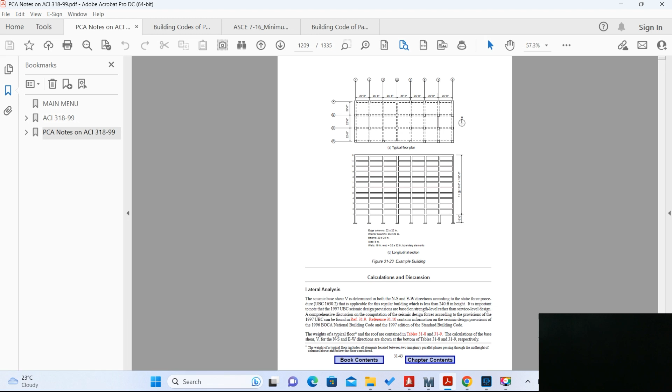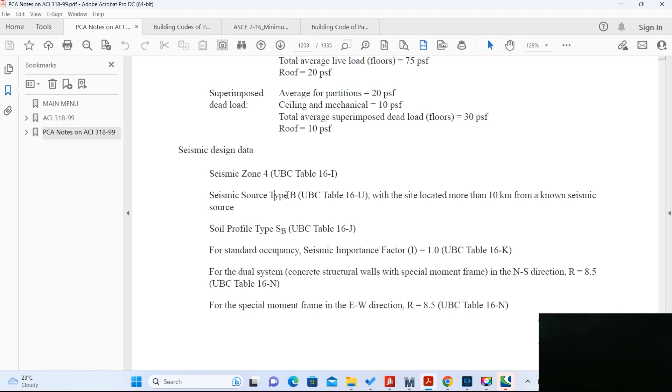As usual, this example I took from the PCA notes on ACI 318-99, an example given on this page: calculation of seismic forces for a 12-story frame shear wall building and its components. So the same example I took, but this time I am not using UBC 97 and seismic zones; rather I am using ASCE 7-16.

So the same example I took from here, and I prepared my load calculation in MathCAD. You can see the building is the same, and now I'm considering Pakistan Building Code 2021, which is the same as ASCE 7-16.

For site conditions, I consider that this building is assumed to be in Islamabad. Why Islamabad? Because Islamabad lies in the lower limbs of the Himalayas, and the lower limbs of the Himalayas have seismic activity, as the Himalayas themselves do.

Before, Pakistan Building Code UBC 2007 considered this as seismic zone 2B. In fact, I have some reservations on that, because UBC 97 actually considered Islamabad and Karachi both as seismic zone 4. So there was a big difference between seismic zone 4 and seismic zone 2B.

Anyway, now I assume the same building in Islamabad, and I have considered the seismic data as per ASCE 7-2016. As you know, in 2016 there are two major changes: number one, the wind load is also an ultimate load now, and the seismic conditions are totally different than UBC 97. So as per our Pakistan Building Code, the basic wind velocity is 100 miles, and we should consider Islamabad as category C.

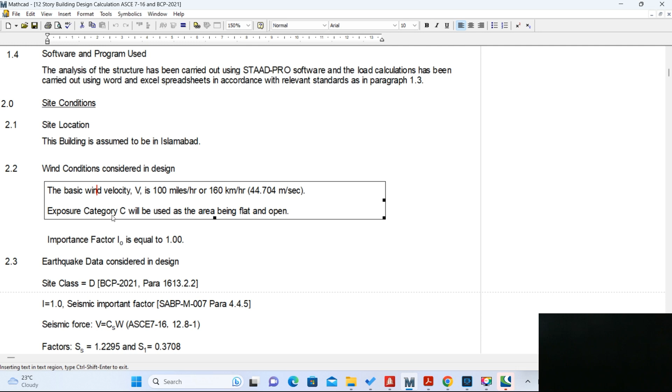In the earthquake data which should be considered in design, the site class should be D, importance factor should be 1, and the factors SS and S1 are SS equal to 1.2295 and S1 equal to 0.3708.

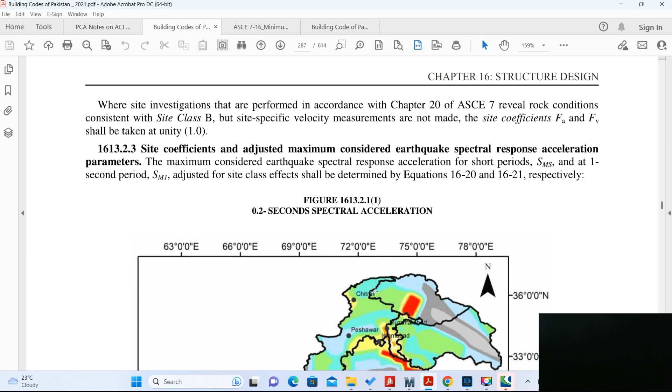From where did I take these values? If I open this Building Code of Pakistan 2021, I'll show you that when they define the earthquake loads, basically they have given figures. For example, this is SS and S1, but these are not tabulated, meaning one has to figure it out from these figures and the color code scheme.

I was not very comfortable with this scheme. I think they should have included a table where specifically these values are tabulated for Islamabad and all the big cities like Karachi, Quetta, Peshawar, Lahore, everything.

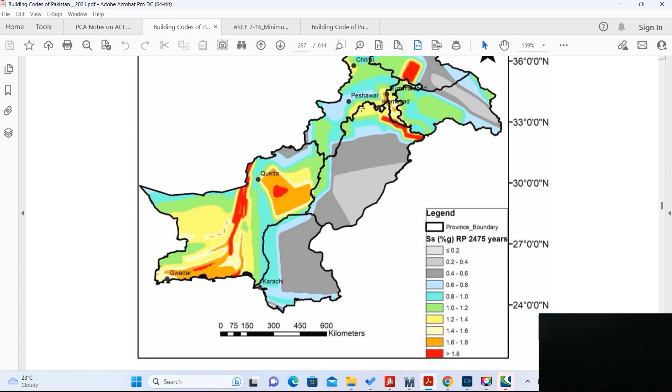Then I found that one gentleman, Fawad Najam, who is one of the contributors of the code, has a website where he has tabulated these values. I'll go to the table - Islamabad is not there, so I took Rawalpindi, because Islamabad and Rawalpindi are twin cities. In Rawalpindi, the SS value is 1.2295 and S1 is 0.3708.

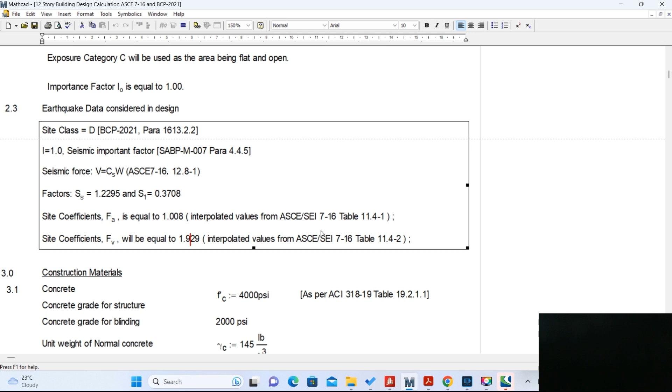So I took these two values and plugged them in: SS as 1.2295 and S1 equal to 0.3708. The site coefficient as per the table, FA is 1.008 and FV is equal to 1.929. You can check these values from the table, but further details are there. The material is F'c 4000, and the concrete unit weight is 145 or 150 pounds per cubic foot. These are standard values, no need to change anything.

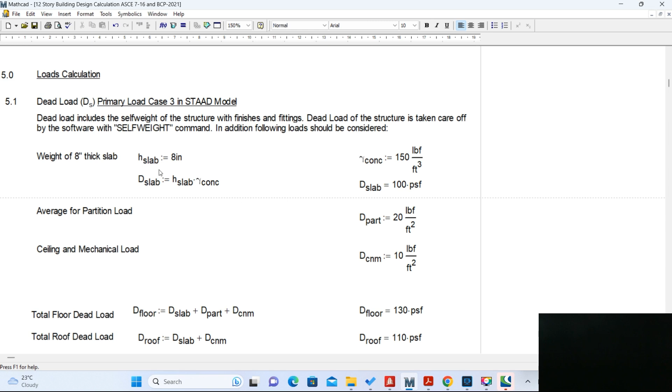But anyway, the important thing is the loads defined here. In my load calculation, the dead load is calculated like this - the weight of the slab, etc. This load has already been provided in my STAAD model, which is the same as the previous model. So all the vertical loads are the same, no need to change those. You can see the dead load, as I calculated before, is the same.

Live load, as per the example given: for the floor, this is 75 pounds per square foot, and for the roof, it is 20 pounds per square foot. Then I calculated wind load.

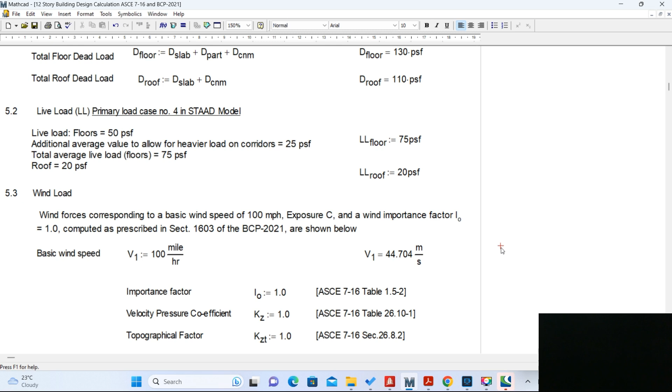As I mentioned in Building Code of Pakistan 2021, section 1603, the wind velocity should be considered as 100 miles per hour, which is equal to 44.704 meters per second. Importance factor is 1, Kz equals 1, Kzt equals 1. All the cross references are provided here. Kd should be 0.85, but I took 1.

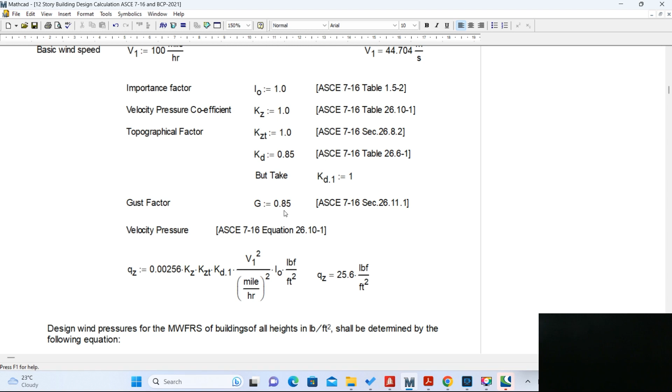The gust factor is 0.85 and the velocity pressure, as per the formula, comes out to be 25.6 pounds per square feet.

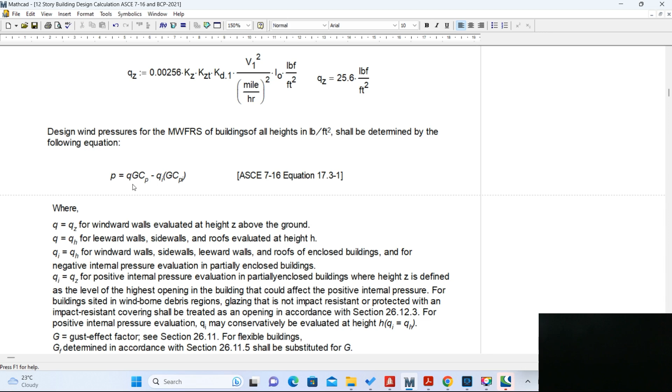For the main wind force resisting system, the load is applied as per the equation P equals Q times GCp minus Qi times GCpi. I used the wind load generator in STAAD and applied the load. I will explain how it is done.

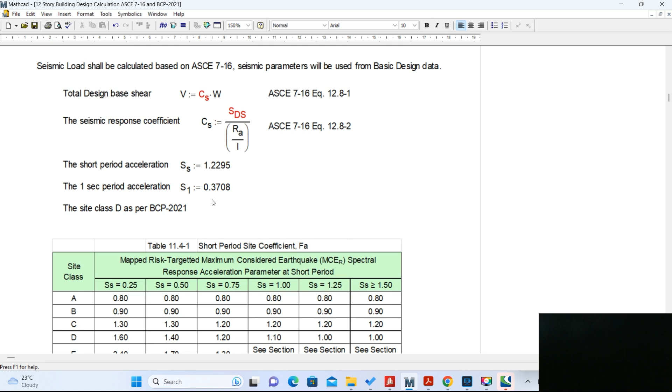For seismic load, as I mentioned, SS equals 1.2295, S1 equals 0.3708, and site class D should be considered as per BCP 2021. The values of Fa and Fv, as per table 11.4.1, interpolated come out to be 1.008 for Fa, and for Fv the value comes out to be 1.929.

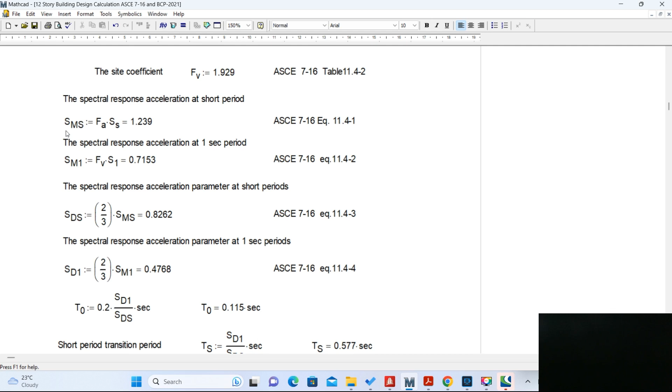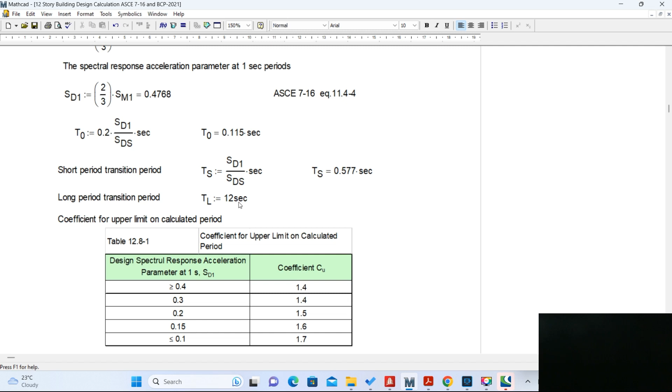Very simple. Then I calculated SMS, SM1, SDS, SD1, and the time period T naught, which as per the formula comes out to be 0.115. The short period transition period TS equals 0.57. The long period I took as 12 seconds. Some people take it as 8 seconds, some take it as 12 seconds, so it does not make any big difference whether you consider 8 or 12 seconds.

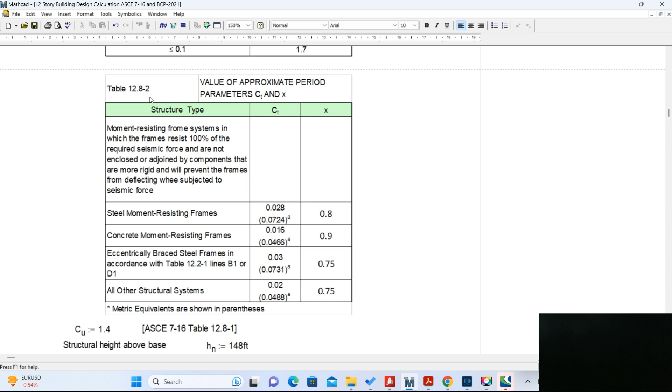The coefficient for calculating the upper limit for the period, CU, is here, and to calculate the time period, the values of CT and X as per table 12.8-2 of ASCE 7-16 are here. I took CU equals 1.4. The height of the building is 148 feet.

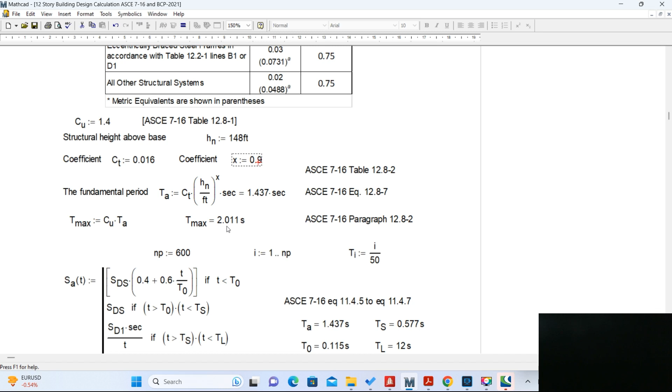CT comes out to be 0.016, meaning these are concrete moment resisting frames, so CT is 0.016 and coefficient X equals 0.9. So the fundamental time period comes out to be 1.437 seconds, and the maximum value of T comes out to be 2.011 seconds.

Based on all this data, I calculated the spectrum, and a spectrum is produced. This design response spectrum is produced here. The value of SA is called the design response spectrum acceleration.

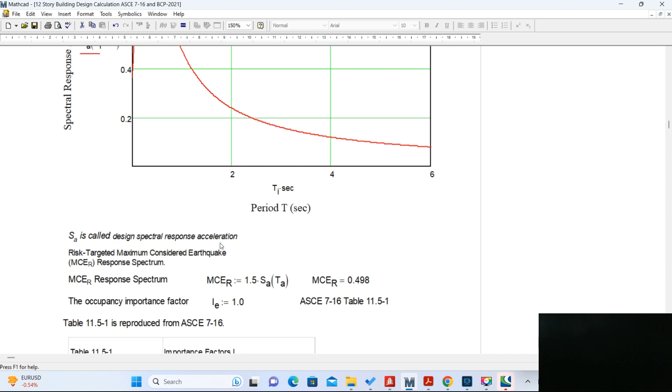This is based on the risk-targeted maximum considered earthquake, MCER. The MCER response spectrum can be calculated with this formula, where MCER is 0.498. The importance factor is I, given in table 11.5-1.

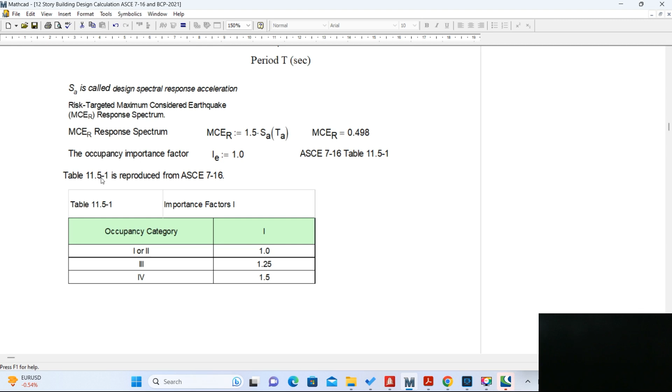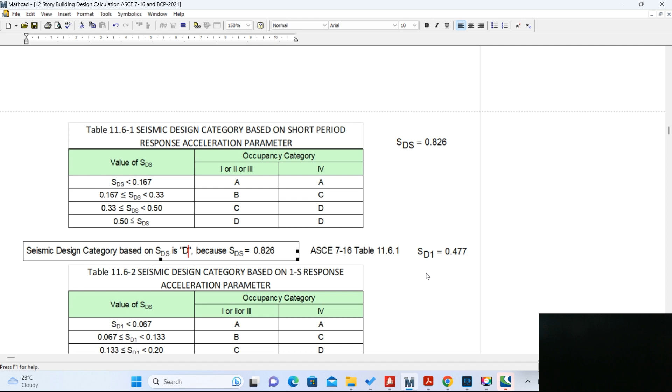Having all these values, I tried to evaluate the seismic design category. Based on short period response, if SDS equals 0.826, then the seismic design category based on SDS is D, and similarly the seismic design category based on SD1 comes out to be D also. So it is confirmed that the seismic design category for this structure is D.

That means in Islamabad or even in Karachi, the seismic design category will be D. So one has to be very careful, because if the structure falls in seismic design category D, there are special requirements and we have to evaluate all of them. I'm going further down to explain the requirements for seismic design category D and what parameters I have considered.

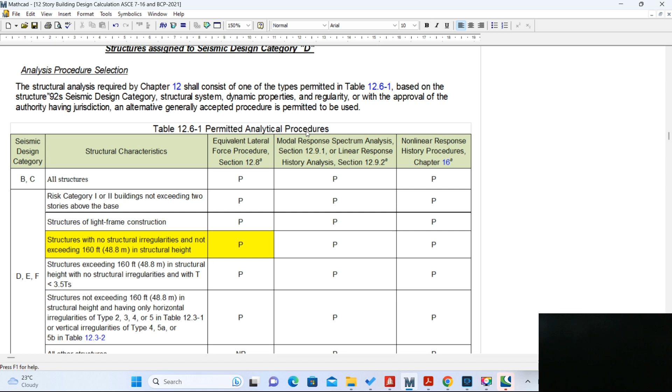For example, what should be the analysis procedure? As mentioned in chapter 12 of ASCE 7-16, table 12.6-1, the permitted analytical procedures are: if the structure has no structural irregularities and does not exceed 160 feet in structural height, then the equivalent lateral force procedure as explained in 12.8 is allowed.

Although you can go for modal response spectrum analysis or nonlinear response history procedure, given in section 12.9 and chapter 16, these are permitted, but we will go for the simplest one, the equivalent lateral force procedure given in 12.8.

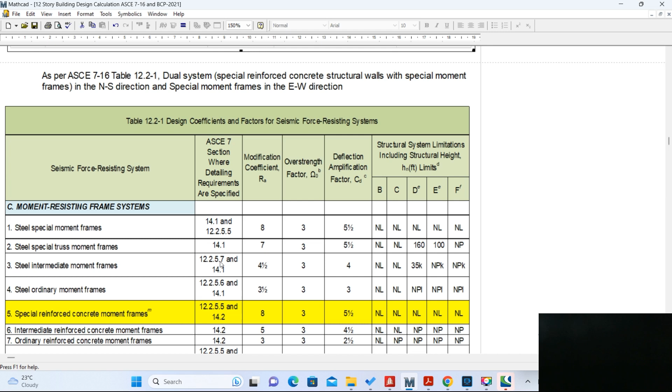So as per the permitted procedure, I am going further down to see that since this building is a special reinforced concrete moment frame, the value of Ra, the modification coefficient, should be 8. The overstrength factor Omega should be 3, and the deflection amplification factor Cd should equal 5.5.

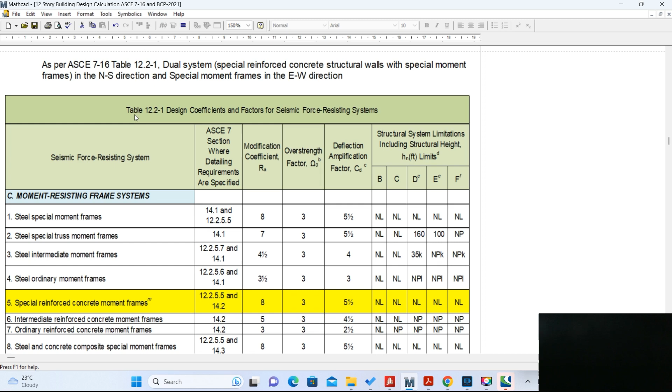Structural system limitation including structural height—there is no height limit, meaning we can safely use these parameters. All these tables are taken from ASCE 7-16, like this table, table 12.2-1. Similarly, in another direction where it is resisted by the shear wall, the values are 7, 2.5, and 5.5.

That means in north-south direction, the shear walls should be considered in resisting the lateral forces. But in east-west direction, there is no shear wall.

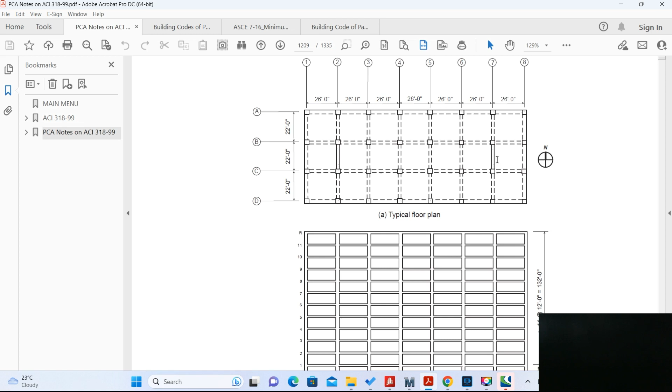So in north-south direction, the response modification factor should be 8. System overstrength factor should be 3, and amplification factor CD should be 5.5.

Now we have to check irregularities. We have to identify types of horizontal irregularity. The types are 1A, 1B, 2, 3, 4, and 5. 1A is torsional irregularity, 1B is extreme torsional irregularity, type 2 is re-entrant corner irregularity, number 3 is diaphragm discontinuity irregularity, number 4 is out of plane offset irregularity, and number 5 is non-parallel system irregularity.

Here in our case, none of the conditions are applicable, so we have not considered any action. This is not applicable. In horizontal cases, this building is a regular building.

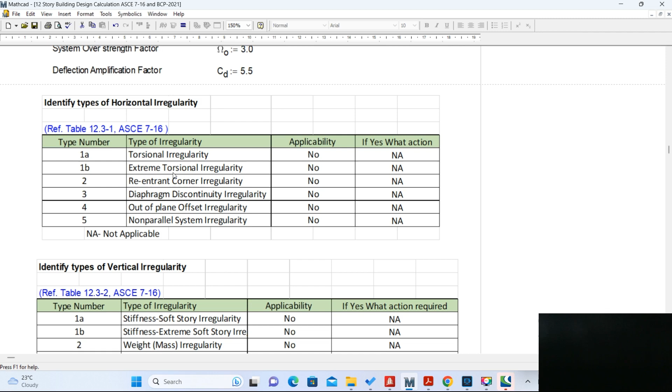What about vertical irregularity? In vertical direction, there are irregularities 1A, 1B, 2, 3, 4, 5A, and 5B. 1A is stiffness soft story irregularity. 1B is stiffness extreme soft story irregularity. Number 2 is weight or mass irregularity. Number 3 is vertical geometric irregularity. Number 4 is in-plane discontinuity in vertical direction. Number 5 is discontinuity in lateral strength, and 5B is discontinuity in lateral strength.

Of course, you can check the details. But again, in vertical direction, we do not have any irregularity, so no action has been taken.

Redundancy factor, as per paragraph 12.3.4.2, I took the value of rho equals to 1.3.

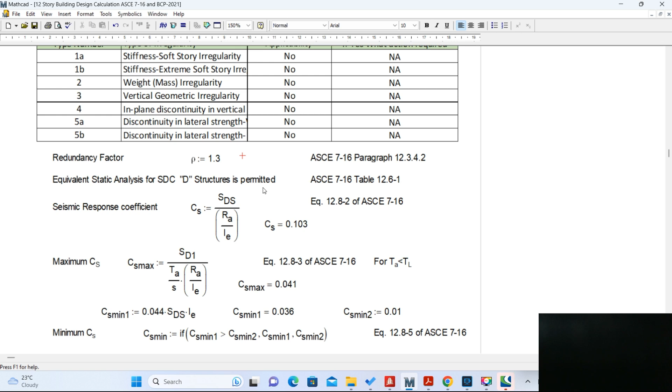Equivalent static analysis for seismic design category D structure is permitted as per table 12.6.1. The seismic response coefficient CS is this much, and finally the CS comes out to be 0.041.

Now here I want to mention one point. In north-south direction, if we calculated this coefficient for base shear based on UBC 97, it was almost the same, I think 0.044. I can say that although the base shear value is almost the same, the value of base shear will not be much different when we compare both codes, that means UBC 97 and ASCE 7-16.

That means if someone is designing a building in Islamabad or Karachi based on Building Code of Pakistan 2007, and if someone is designing the same building with the new code, Building Code of Pakistan 2021, he will get almost the same value of base shear. But then what is the difference? The difference is in terms of detailing requirements. So not only do you have to be very careful in evaluating the base shear, but also you have to think about the detailing requirements of the structure.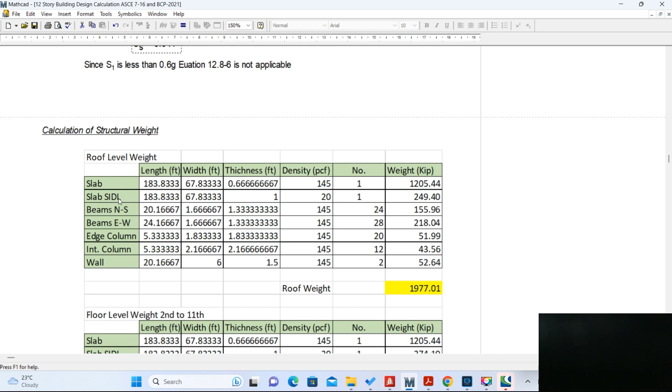So here I'll explain how I further calculated the structural weight: the slab, superimposed dead load, beams, column, and total weight. That's from second to eleventh story, and this is the ground floor.

So all these values are calculated here, and then I distributed the seismic load in vertical direction in north-south direction. This is the vertical distribution of base shear in north-south direction, given by equations 12.8-11 and 12.8-12 from ASCE 7-16.

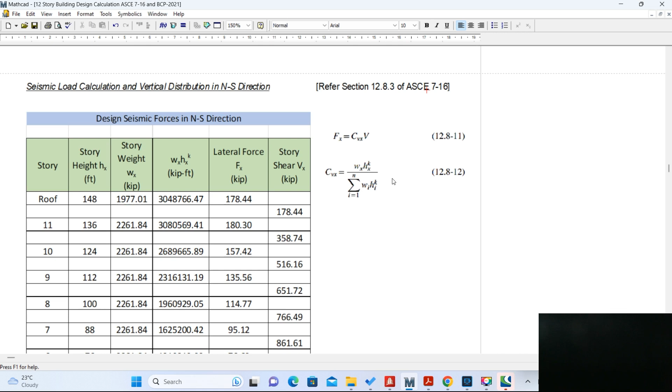So I tabulated all these values and calculated the story shear, for example at roof, 11th, 10th floor, etc. This is the total value of base shear distributed vertically.

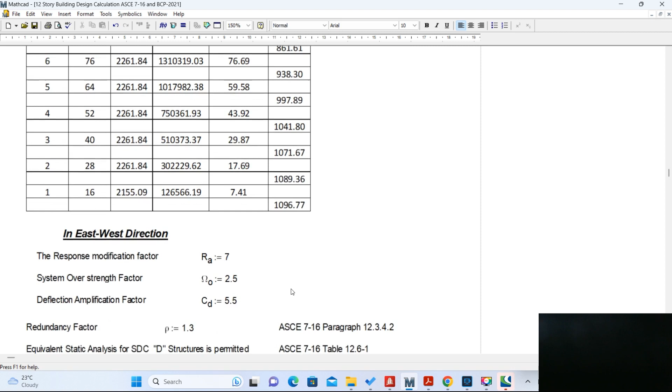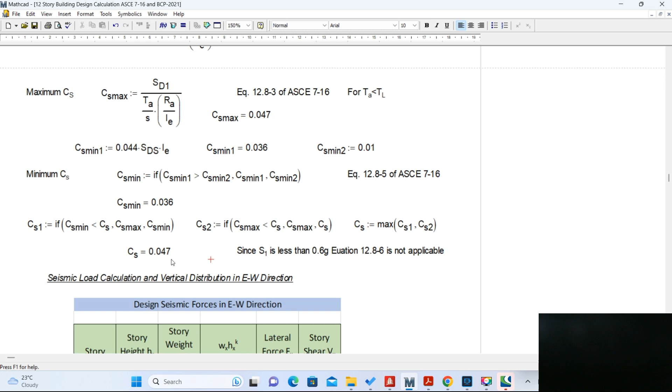In east-west direction, as you know, I have taken R is equals to 7, omega is 2.5. The whole procedure is the same, just a replica of the north-south direction. Here the coefficient for base shear comes out to be 0.047. Again it's almost the same, so the base shear is in the same order, and the vertical distribution in east-west direction follows the same procedure.

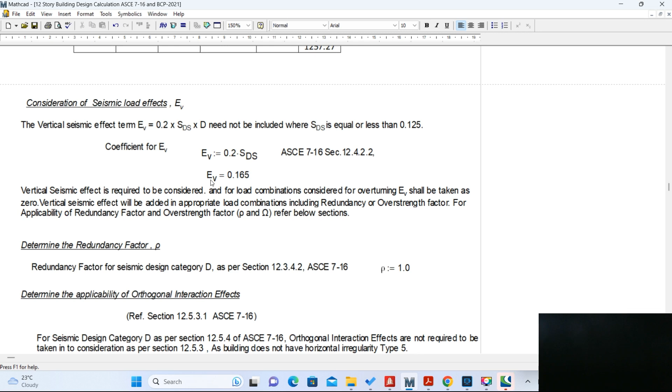So the base shear value remains almost the same, but now there is a big but. We have to consider the effect of vertical seismic effect EV, which is 0.2 times SDS times D, the dead load, as per section 12.4.2.2. Here I calculated the coefficient for EV, which comes out to be 0.165.

Rho I have considered as 1.3, as I have mentioned before.

Now we have to determine the applicability of orthogonal interaction effect. For seismic design category D, as per section 12.5.4 of ASCE 7-16, orthogonal interaction effects are not required to be considered, as per section 12.5.3, because the building does not have horizontal irregularity of type 5. So this is very important.

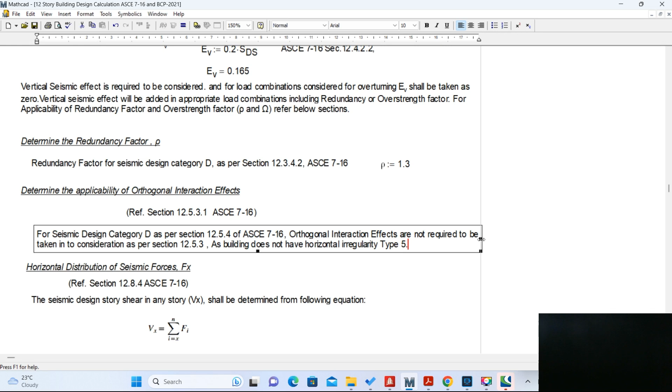Now, horizontal distribution of seismic force effects. I have generated the seismic force by the load generator of STAAD Pro, so it distributed the load by itself. I did not do anything; I left it for the software to consider.

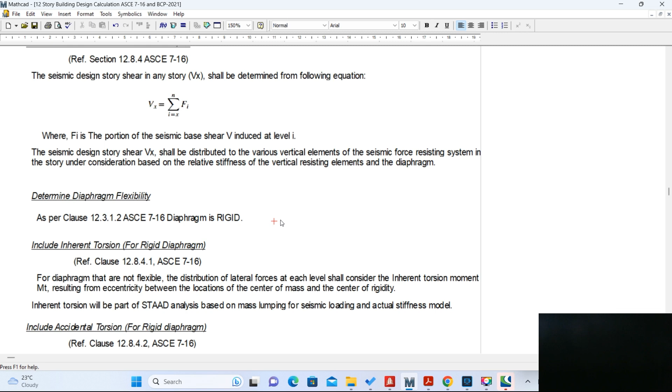Diaphragm flexibility: as per clause 12.3.1.2 of ASCE 7-16, the diaphragm considered is a rigid diaphragm. So I modeled this diaphragm as a rigid diaphragm in STAAD. Accidental torsion for rigid diaphragm, I considered 5%.

This inherent torsion will be part of a STAAD analysis based on mass lumping for seismic loading and actual stiffness model.

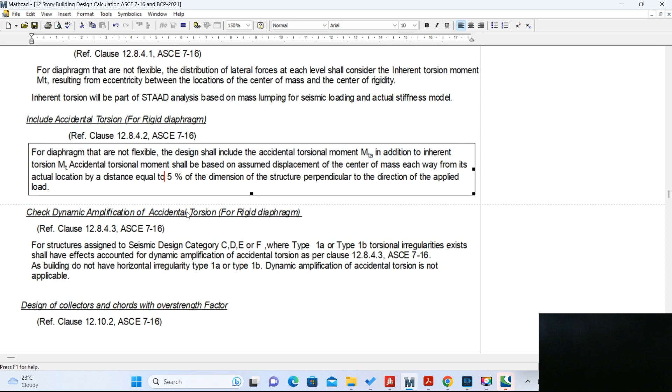Accidental torsion is taken as 5%, which is a general rule, nothing special. Dynamic amplification of accidental torsion for rigid diaphragm is not applicable in our case because there are no irregularities of type 1b, etc.

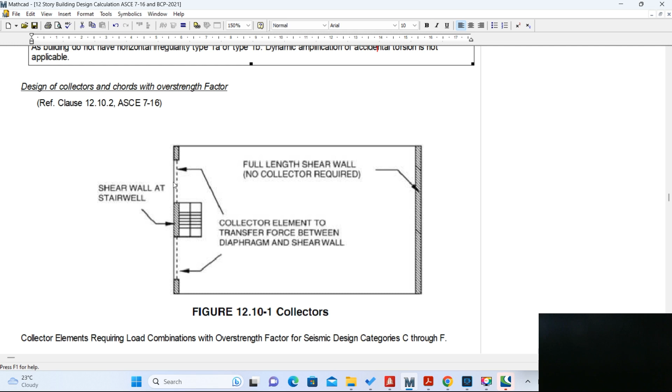Design of collectors and chords - this is very important. As per figure 12.10-1, for a full length shear wall extending from one end to another, no collector is required. But for example, a small shear wall like a stairwell, the beams connecting the column and the shear wall are called collectors. In our example, I considered another load combination for collectors, and the beams are checked against these loads.

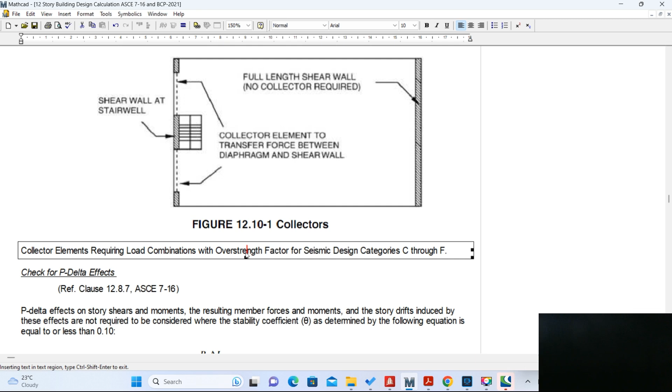So the collector elements require load combination with overstrength factor. This is very important for seismic design category C through F. Our seismic design category is D, so we have to consider overstrength factor to design the collector elements.

The P-delta effect as per clause 12.8.7 ASCE 7-16 - we have to check whether P-delta effect should be considered or not. I did not go into all these details to check everything, but I considered P-delta because I know that in concrete structures it is better to perform P-delta analysis.

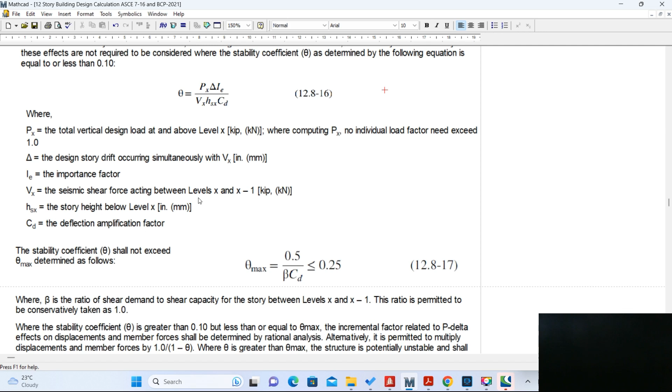So as I have mentioned, P-delta analysis has been performed by STAAD Pro.

Now for structural wall and their anchorage, they shall be designed for a force normal to the surface equal to FOP, which is equal to 0.4 SDS times the weight of the structural wall.

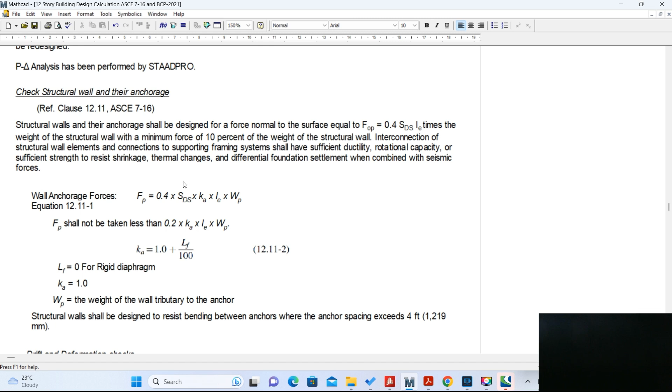Actually, in this example, I am not designing the structural wall separately, so for the time being I just left it as it is. Maybe in part 2 of this lecture, I'll design the structural wall and then consider the load as specified.

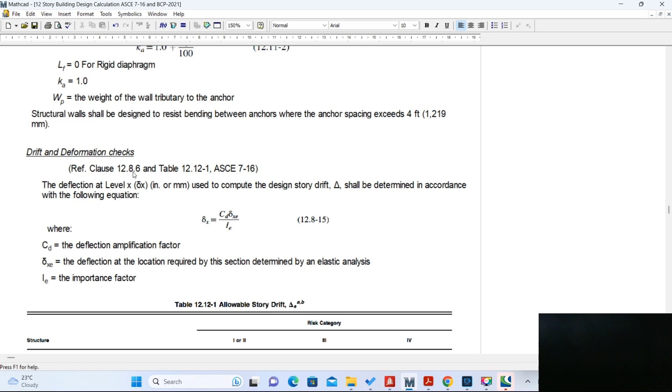The drift and deformation check - yes, this is done because for all other structures it's 0.02 times hsx, so the drift is checked with this parameter, and STAAD checks the drift with the limit given as 0.02.

So the detailing requirement - a special moment frame shall follow all requirements given in chapter 18 of ACI 318-14. 19 and 14 are the same. So all the detailing requirements should be fulfilled as per ACI 318.

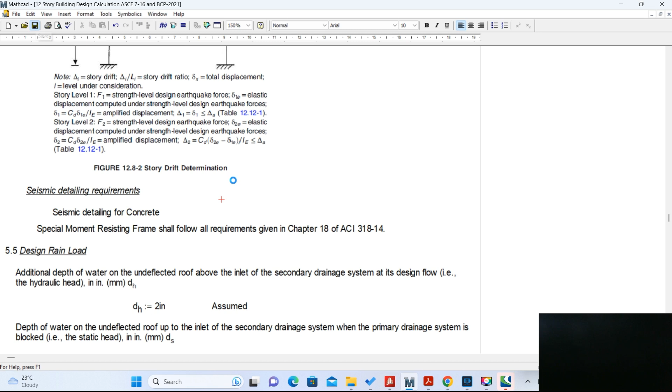Of course, in Islamabad, rain is there, so I have considered as per Pakistan building code the rain which is 2 inch. So the load of rain is equal to 52.52 pound per square feet.

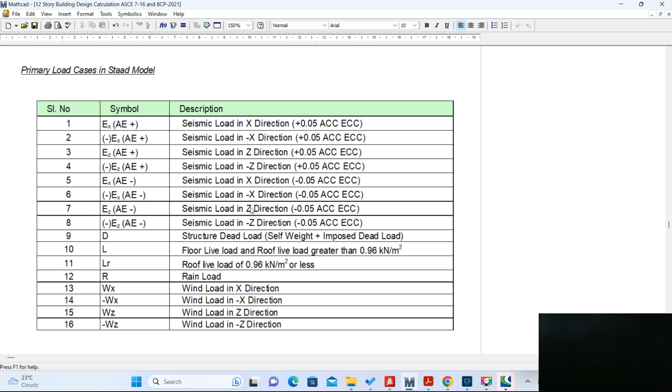Having all these loads and information given, I have considered these load cases. These are the primary load cases - for example, seismic load in X with 5% eccentricity, in negative direction, Z minus Z, in X and minus X, Z and minus Z.

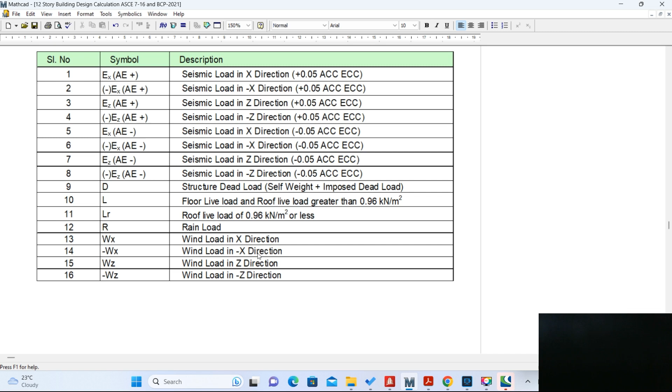So these are 8 seismic load cases. Ninth is the structure dead load, 10th is the floor live load, and the roof live load is taken as this. Rain is load case number 12, and at the end I define the wind load in x direction, minus x direction, positive z direction, and minus z direction. So all these loads are defined in my model.

I'll explain the load combination now - this is very important.

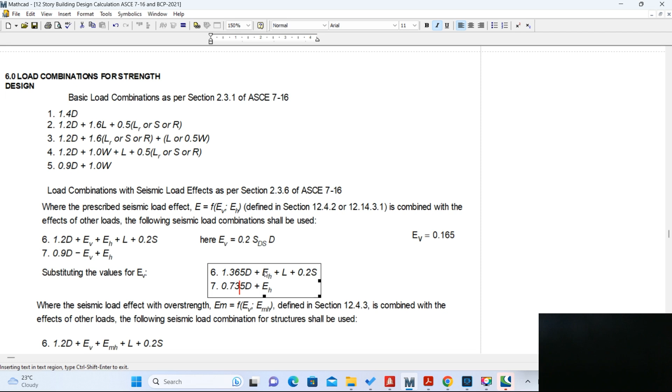My experience is that if you are using STAAD, you cannot generate the load combination based on the automatic load combination generator, because the vertical effect, etc., is not considered properly. So it is always better to check these conditions and then apply these combinations manually.

For example, the basic load combinations, equation number 1 to 5, are the same, no issues there. But when the seismic load is prescribed, you have to consider load combination number 6 and 7, where you have 1.2D plus EV plus EH plus L plus 0.2S. With all these factors, my load combination becomes 1.365D plus EH plus L plus 0.2S, and equation number 7 becomes 0.735D plus EH.

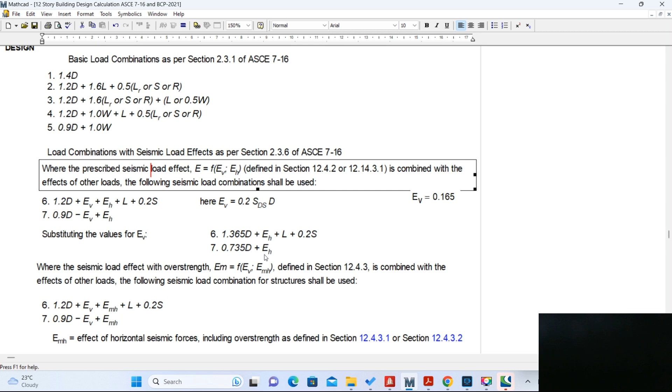For chords where the overstrength factor should be considered, as per section 12.4.3, the load combination should be 1.2 plus EV plus EMH plus L plus 0.2S. Here EMH is omega times QE, where QE can be taken as the effect of base shear calculated above, so it should be multiplied by omega.

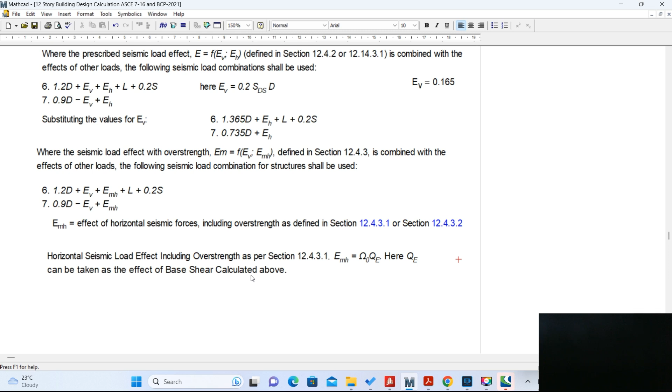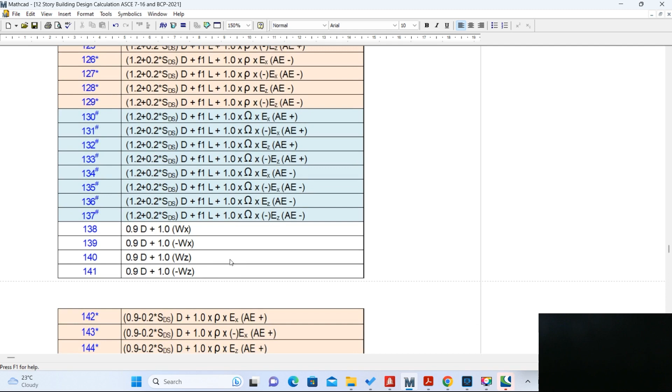So what I have to do is modify all my load combinations if generating them by load generator, or input manually all the load combinations. So all the load combinations are tabulated, defined with rho and omega. So a lot of load combinations are generated because of the seismic forces.

So let's go back to the model. This model, as you can check from my previous video, is the same model I have used.

The shear wall is 18-inch thick, and the external columns are 22 by 22 inch. The beams are 20 by 24, and internal columns are 26 by 26.

Then loading - as I mentioned, I defined the wind load cases. For wind load in positive x direction, same as wind load as per ASCE 7-16, the intensity is there, and wind load cases are here.

For example, the wind load in z direction - it will take little time.

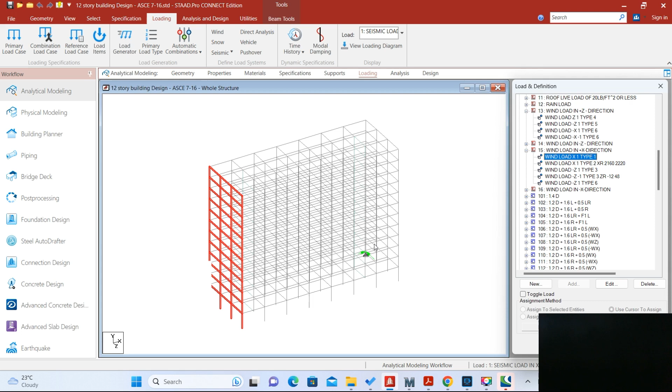It takes a little time to generate all the forces. So if wind is in the positive X direction, this is the windward, leeward, sidewall, all. So these forces are already calculated.

And for seismic conditions, as per ASCE 7-16, all the values are provided over here - weight, floor load, etc. All these values are provided, and all these seismic loads are provided here.

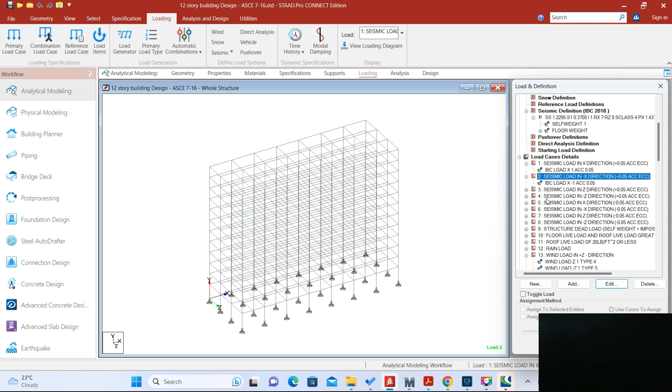Now, with all these loading conditions, if I analyze, it will take a little time, but anyway the result is that I will use to design the beams and columns, etc. I will use the advanced concrete design module of STAAD.

For the beam it's okay, but for the column there are some problems. Let me show you first what happens if we design the beams. I'll just design beams of only one floor, and then we will see if there is any failure or anything needs to be changed. Secondly, I'll design the columns and we will check.

Shear wall design is a very good question in STAAD. Shear wall design is provided in the advanced concrete design module, but the problem is it's a little bit tricky. So I prefer to design the shear wall manually, which I will cover in another lecture, but not here. Maybe I will develop one detailed lecture to design the shear wall in RCDC, that means Advanced Concrete Design of STAAD module.

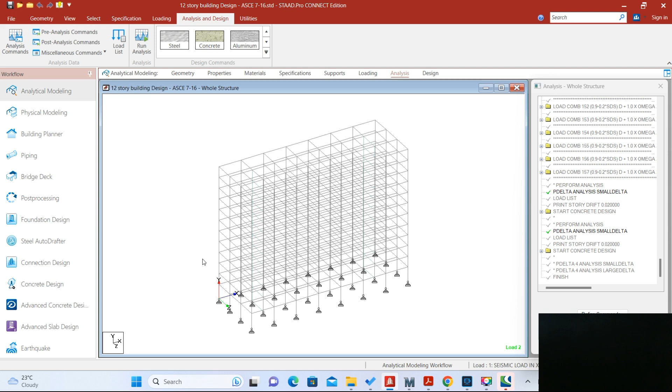Anyway, let's go to concrete design, RCDC.

So the project, maybe, 12 - a 12 story building. Client XYZ, engineer MSH, and I'm designing as per ACI 318-14. So the beams, maybe we can select - no, not the top roof beam, rather maybe the first floor beam.

So typical beams are there - this is beam number one, beam number two, beam number three, beam number four, beam number five, six, seven, eight, nine, ten, eleven, and twelve.

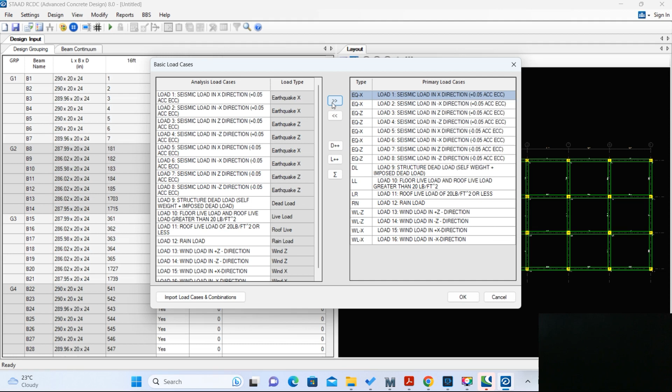I'll select all these load cases and I will transfer here. So all the primary load cases are defined. Now, add from analysis.

No, it's okay. Now here, since all the load cases are selected, what I'll do is select those load cases which do not consider the overstrength factor - that means my load cases are from 101 to 129. But then from 130 to 137, these are for collector elements which I am not going to consider now.

But then 138 to 149, these should be considered. And again from 150 onward, these loads are for collector elements, so I will not consider this because here the overstrength factor is 3. Now, okay, then I'll go to auto design.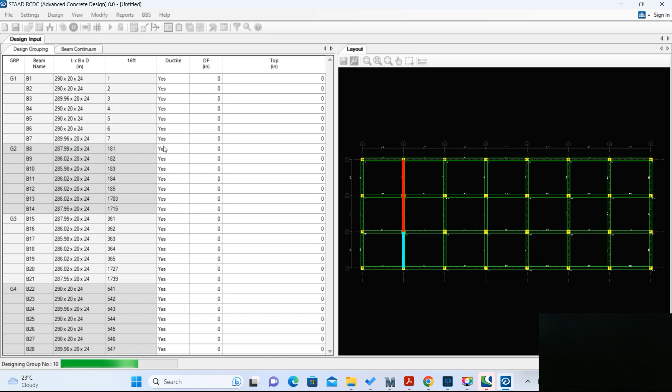You can see here a green strip from top to bottom. That means no beam fails. All the beams are designed, so there is no issues. And in the report, we can go to failure diagnostic, nothing. So that means beams are fine here, no issues.

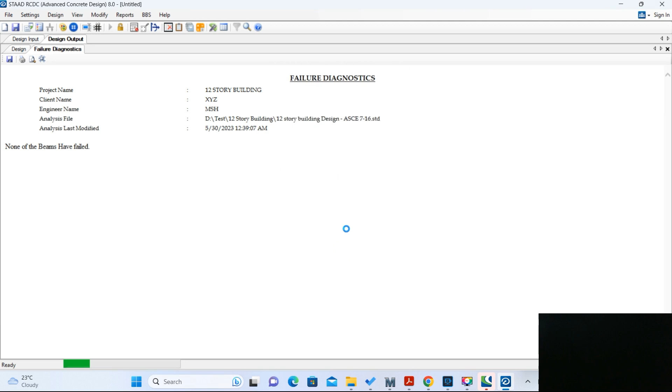For example, if we want to see the design calculation, we can click over here, as an example, just one beam. So detailed design calculation is produced. You can check the applicability of the clauses in chapter 18. All the clauses are mentioned over here, so you can see a detailed design calculation is there.

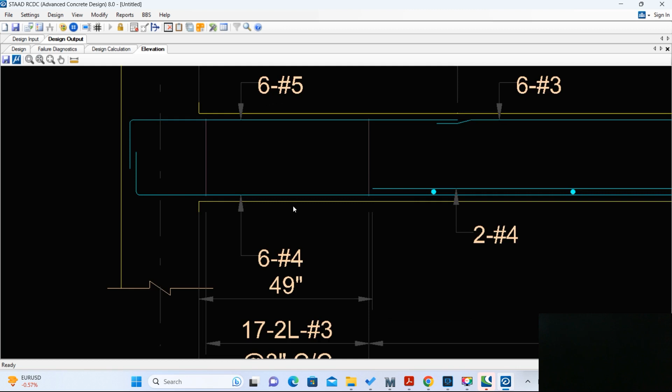Now you can see the elevation and section, that's for only one beam. Now you can see the bars, elevation, section, etc. And you can see the proper detailing, everything is there.

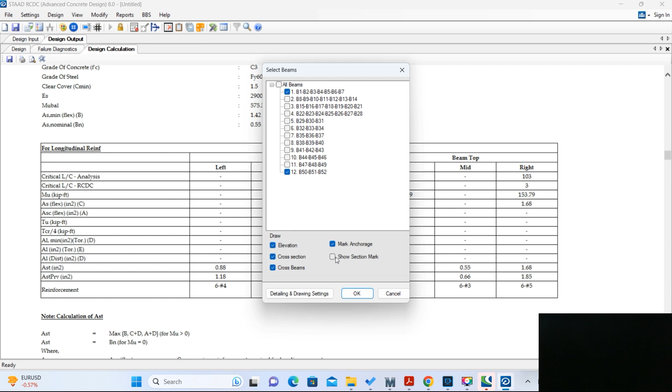For any other beam, we can see, for example, beam number 12, or say beam number 1. So it will draw elevation, it should draw cross section, it should draw the cross beam, mark the anchorage, and this section mark should also be shown.

So now you can see a very detailed drawing is prepared. The beam reinforcement, all these reinforcement, column location, and the cross beams, they are also shown. These are the sections, stirrups, everything is there.

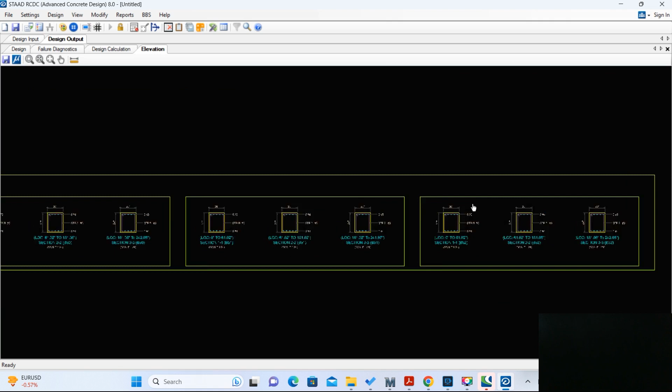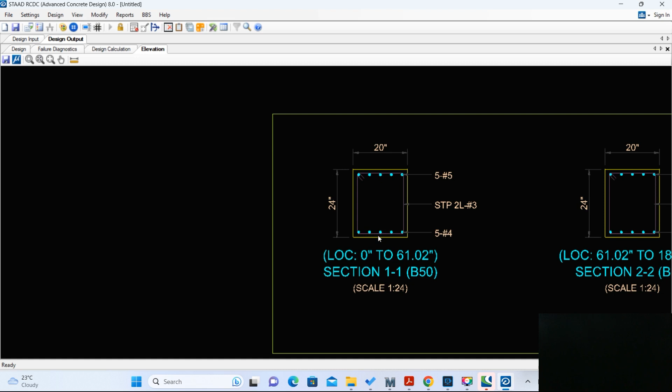But for these stirrups, you have to check that there should be a tie in the middle or not, because these tools are our slaves. We should not be the slave of the software. As an engineer, you have to check each and everything before releasing the document for construction. So here you have to check the bars, their spacing, and the requirement of stirrups, additional stirrups, whether it is there, it should be there or not.

That I am leaving for the viewer, they should decide by themselves. I'm just trying to explain how we can easily use the software and generate the drawings. But be careful, the software is not an engineer. You are the engineer, and you should know the limitations and the provisions. So before issuing the drawing blindly, please check. Each and every detail should be checked.

So we can save the file. It takes maybe a couple of minutes to go back to the STAAD model.

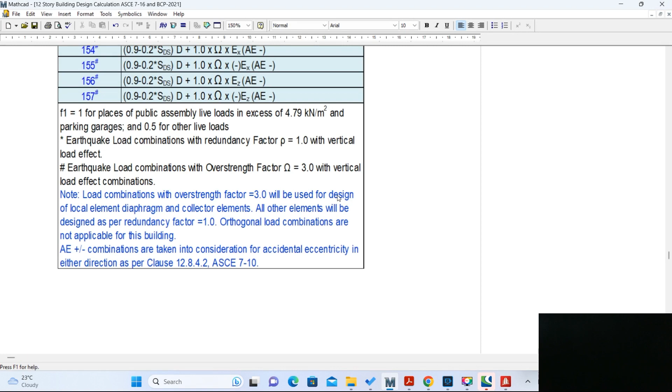That means whether you are following UBC 97 or you are following ASCE 7-2016, that means in Building Code of Pakistan 2007, or you are following the new Building Code 2021, base shear will be the same.

Beams, they appear to be same, but one has to check carefully. But now I'm going to check the columns. So again I will select RCDC, and this time...

318M. Why I selected? Because in 318 2014, if I select, so the columns cannot be designed. So I have to select 318M column. So let's create the new project.

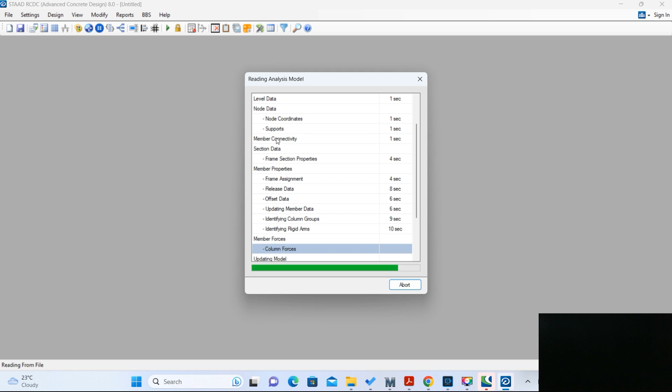Settings, design settings, of course, ductile design, special moment frame. Okay, everything is there.

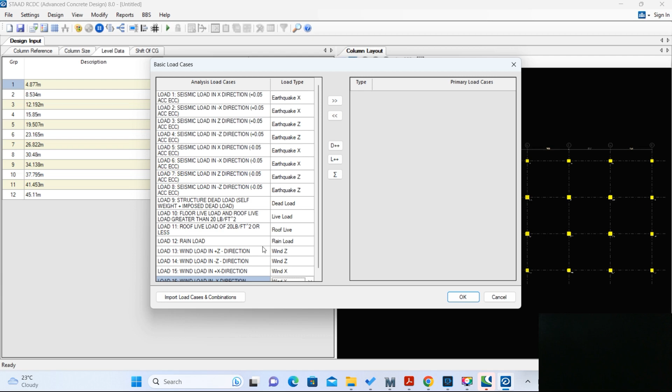Basic loads, basic loads. Again, I have to define earthquake X, earthquake X. I have to define earthquake Z, earthquake in Z direction, earthquake X, earthquake X, earthquake Z, earthquake Z, then dead load, then live load, then the roof live, rain, wind in Z, wind in Z, wind in X, wind in X, and select all the load cases. So it is there.

Same thing. No, I don't want to do anything. So all the load cases are there as I did before, for the column also.

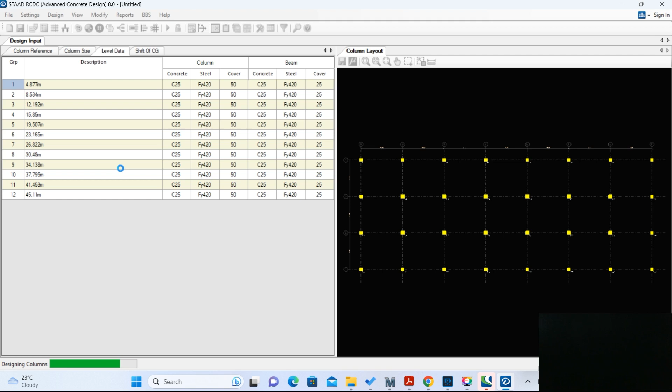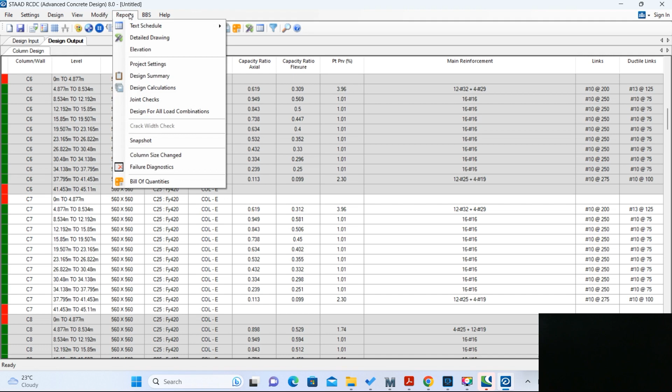Now you can see column failure. These columns failed. Here the red line, it shows that these are the column failure. Why? Go to failure diagnostics. Failure type is mentioned over here. That means these columns do not qualify for even load and axial bending, plus in detailing, etc.

Some are failing because of the detailing. So that means I don't want to save.

That means if you are designing a building, then you have to be very careful as per the new Seismic Code of Pakistan or ASCE 7-16. You have to be very careful for the columns and very careful for the detailing requirements. So this is my message for the engineers who are designing as per ASCE 7-16, that for God's sake, please be very careful when you are detailing the columns, and you should check each and every detail.